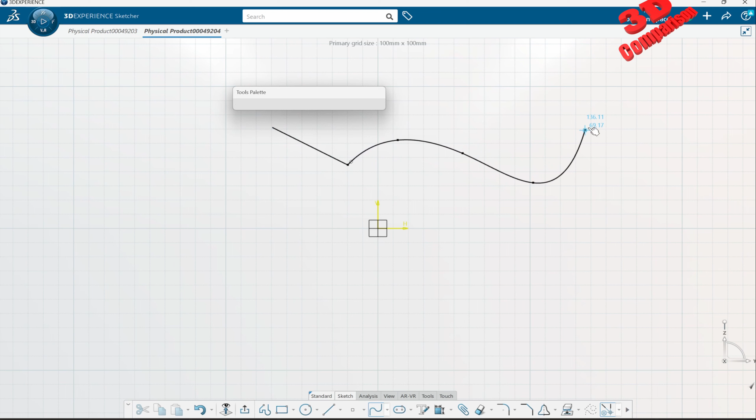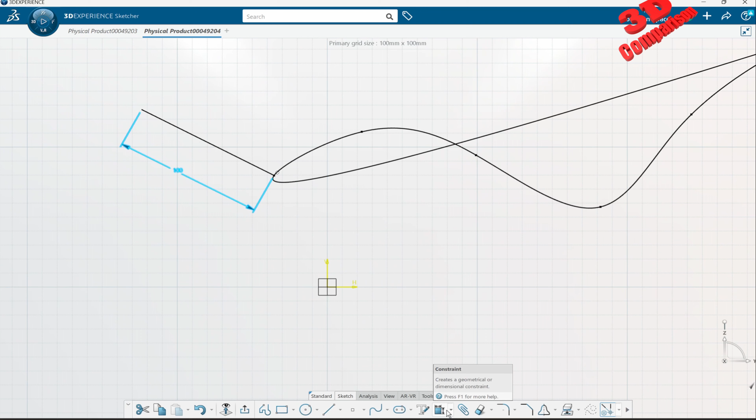I like CATIA V5 because I would position those a little bit better, according to my needs, especially within more advanced workbenches such as generative shape design. Over here I will always need to go on the bottom and select some elements over there, and in my opinion this is not very productive. You will need a lot of hotkeys, and that is something that currently CATIA is lagging.

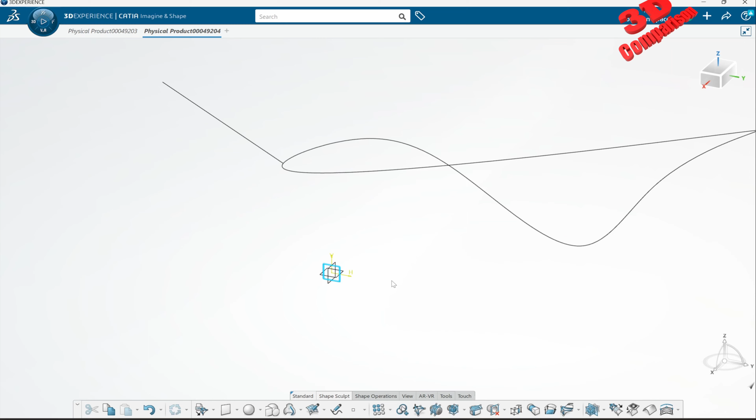It's the same approach for example with Imagine and Shape, this workbench. Within Imagine and Shape, we're gonna have the same hotkeys. For example, if I want to define a sphere over here, by default, I should press Alt, Shift, and H. And I don't know, that is something that I don't find intuitive.

We see that over here, the same tool palette. So if you want to do a translation, you're gonna need to press the default hotkey Ctrl Shift plus T. Yeah, those are some hotkeys that in other softwares you're just gonna do a simple button press, and afterwards you're gonna work with that. So this is something that I don't really like about 3D Experience.

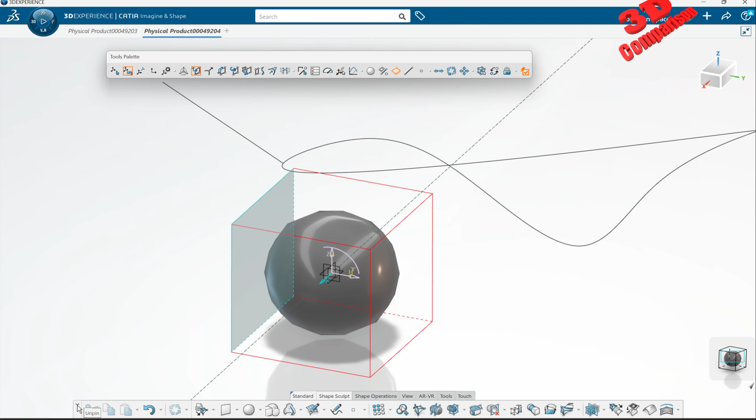Not sure exactly if the bottom, so I can have that unpinned, but as we can see, that will just move it from the screen, so it will no longer be pinned over there. But yeah, if I want to move some features over here...

We can see that we can go within customize mode. Let's see, remove add groups. So yeah, maybe we can start moving those around, but I feel like the default setup would be a lot better, where we have those positioned directly within a good spot, and we can just use them. Over here they just added everything at the bottom, and for Imagine and Shape they have kept the tool palette functionality.

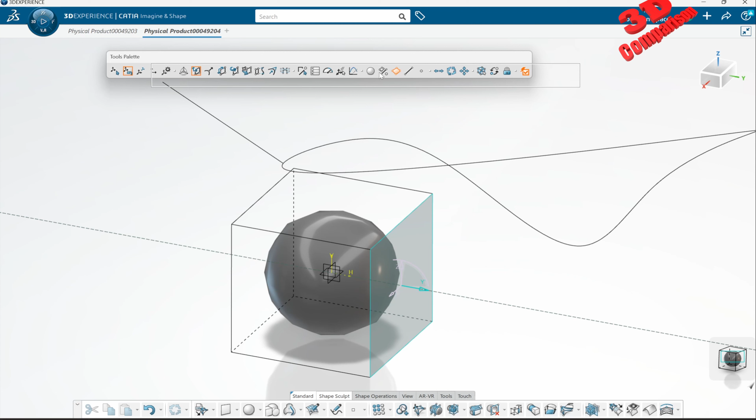Okay, so this is what I wanted to say regarding this, because I have to agree that I also don't understand why they do this, and also for 3D Experience they have been working on it for so many years, and this hasn't still been adopted by the vast majority of especially companies, because academic institutions will jump faster to this one, but companies, on the other hand, will have a harder time getting started with 3D Experience. Okay, so I hope you enjoyed this content.